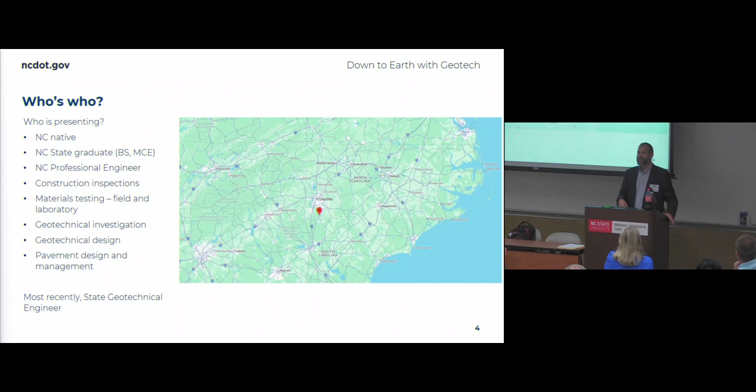So further introductions, I just kind of wanted to introduce the unit. Let you all know, so this is pre-construction focused. And so the unit on the pre-construction side is sort of divided between investigations, the geologist, and design and the engineers. And so I don't need to read the map to you, but what I do want to point out is...

All right, first of all, if I put this map together, I would not have put these in alphabetical order when the colors go in a different order. But I'm just working with what I got here. So what I want to point out is we got an Asheville office. They're all okay, for those asking. We've been in touch with everybody. We got an office down in Harrisburg outside Charlotte.

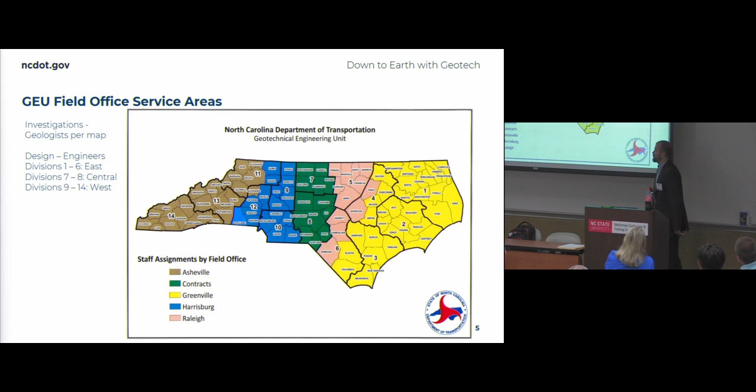That's where design is, and Eric is my assistant in the West. And then we have a group at Century Center that's called Contracts on this map, but we cover 7 and 8 currently. And then we have a Garner office in Wake County that they kind of divide up the coastal plain with our Greenville office. So we've got investigation crews in Greenville and Asheville, which I'll touch on shortly. But just kind of wanted to throw in some org slides.

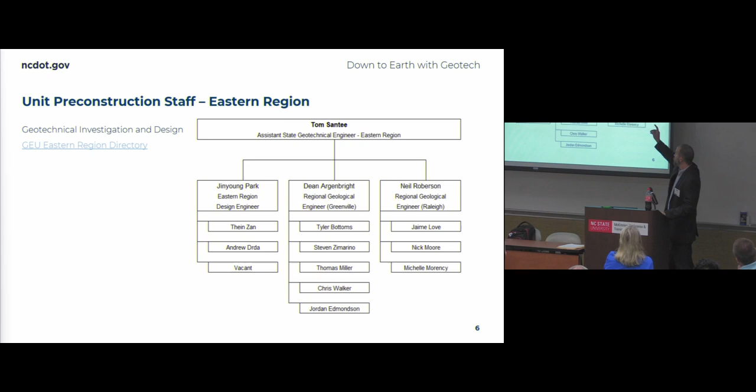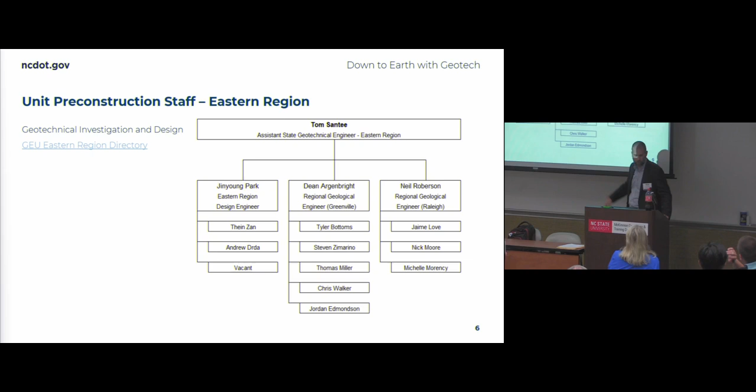I kind of just wanted to introduce the East. So a few of these guys are here from the design group. Y'all want to raise your hands? Jinyoung, Drda. Thein didn't make it, I think. And then the other two are investigations groups, and then these guys are our internal drill crew in Greenville.

And then centrally, like I said, we cover 7 and 8, design and investigations. That's also where we handle contracts for the field offices. So everybody that's contracted through our contract works with that group. They handle the money and contracting aspects. And then the statewide pavement group, or geopavement group, is there.

For those of you that aren't familiar with how that's set up, not confusing at all, but we basically do pavement up to the bottom of the pavement, the grade 2 line. We tell them what to put it on. We tell them how to prep subgrade. We give them all those recommendations and quantities. We're going to kind of touch on that in a little bit.

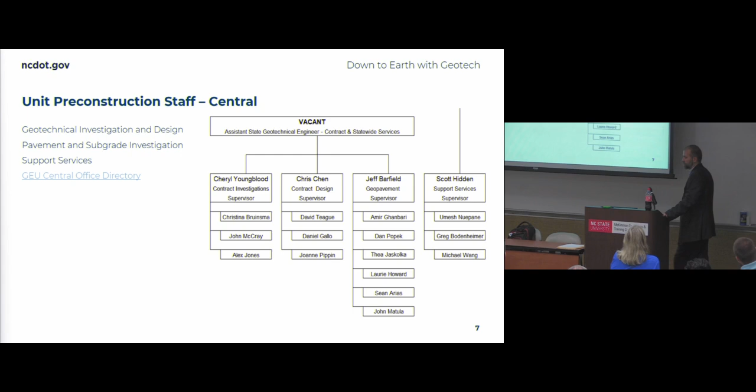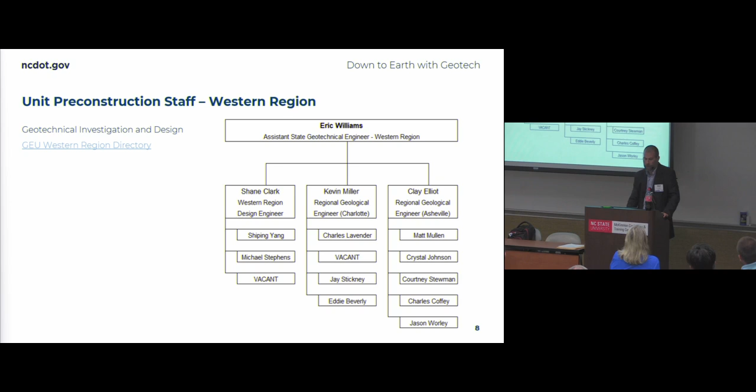So just kind of want to let y'all know that too, because as you're working through things and as you're working through projects with your consultants, more just so you know who to reach out to. And if there's any question about what's expected, you know who to reach out to.

And so one thing I wanted to dump in here for the PM folks and everybody else is this work request form that we sort of put together, or it was together, it was floating around in various states of completion, and we combined our service lines into one. So for you internal folks who are managing projects, you've probably already seen this, but we use this to basically track projects within the unit. The unit has traditionally worked on request, and so since we work on request, we have to receive request, and receiving request in a standard way helps us to process that request and keep things moving.

So that's what we tried to do here, is just give us all the information we need. And then these emails, which didn't come through very well but are also at the end, are the Geo pre-let emails that some of you may have seen. They have the divisions actually in here, so you don't really got to think about it. You just got to know where your project is. You hit that email, it'll hit all the right people in those org charts shown back in there, and you know that you're getting it to the right people in the unit. We'll disseminate it down, get somebody working on your request.

This can also be used, I mean, this doesn't have to be used for projects. So like if a project is not running through our contract, you can use this to say, hey, I got this scope and an estimate, and you review this one. Send that in. We got another, there's an other one there. Type it in the box. What I need you to do is I need you to be involved. So that's all we're really looking for here.

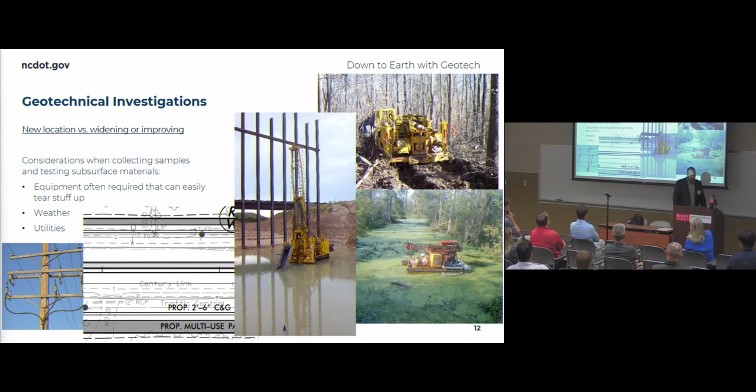This doesn't come through very well, but there's a lot of widening projects now. Guess where all the utilities are? Where we're widening. How are you going to put a hole where all the utilities are? And on top of that, when you're looking at subgrade, a hole 50 to 100 feet off the road probably isn't going to be indicative of what you're putting pavement on anyway. So in addition to the utilities and the weather, which is raining up until this week too, there are other complications out there.

Like I said, we're some of the first people to make contact with property owners. I don't want... we're some of the first people property owners see, and although we're covered by a general statute to go in and take samples and do what we need to do, you catch more flies with honey. So we generally try to be amicable, and since I've been over here, we've also prepared a template letter for property owner notification that standardizes that language for our consultants.

Access coordination, this could be a picture of the railroad up there. Everybody loves working around the railroad, right? I sit in meetings with contractors, and they're asking DOT, hey, can you get me into the railroad any quicker? No, it holds all of us up too. Like everything that gets pushed down the road, that's just how they work.

Further complicating matters, this is an excessive bench here. We probably wouldn't do that, we want to stay away from that. But I put it in to talk about cutting benches. Thinking further west, the level of coordination has increased drastically, sometimes requiring erosion control plans, getting contractors lined up to come out and do your bench, then come back and abandon it. It just turns into a whole thing now. That's why I put a picture of the mulcher up here, because a lot of people have gone to mulching — you don't break the root mat, you can drive right in. So that's the preferred method.

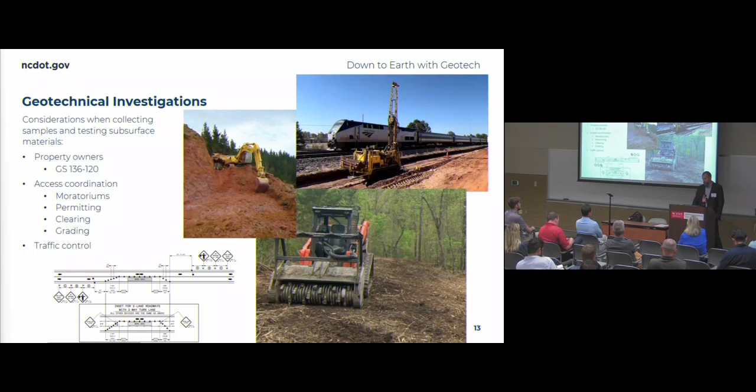So now we're really getting into the PDN revisions, which I worked on in my old position with John and a few others, and sort of drug into this position and wrapped up because I was already into it, and I'm learning how to delegate better.

The 1GT1 is more of a planning phase for us, and at this point I'm just asking that we get a request to know that a project is starting to move forward. I've added — this is nothing new, it was there before — both Geo-Environmental and the Geotech were there.

Sorry to any environmental folks, but this isn't a Geo-Environmental presentation. I love them, but not what we're talking about today.

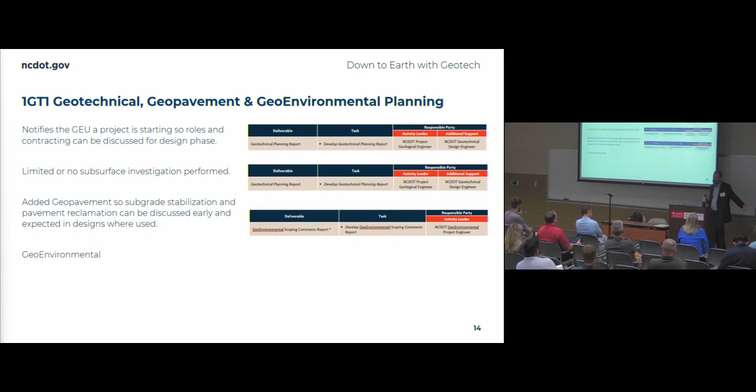I did add geopavement to this because I've seen a need to coordinate subgrade stabilization, what's been done, what works for certain projects in certain areas. We need to start having that communication earlier about getting some of this stabilization, be it chemical or aggregate subgrade, into plans and estimates earlier.

One big change you'll notice is that I took all of those old boxes that basically said start here, follow up with us here, then finish it up, and I stuck them into one. So the geopavement and the roadway are now under one activity, like subtasks under that activity.

For those that have been working with the unit, we've been letting POs and projects that way, trying to keep those investigations together, because similar equipment is used, drill rigs for both of them most of the time, and similar coordination, traffic control, utilities, all those things.

So as not to duplicate efforts, to streamline the investigation and get things done quicker, and also so that the engineer is looking at both aspects, because you want to look at your mass grading and everything, all your earthwork coming up to subgrade, but also pay attention to what you're doing with that subgrade when you get it there.

The other thing I put in here was, you've got your Bentley ProjectWise. I would encourage some of the private teams, as you're working on this stuff, to think about how we can not duplicate work, because the traditional workflow for us was we sketch it out, put it on the 25% plans at the time, and then turn it over, and the roadway person has to take it and do it all over again.

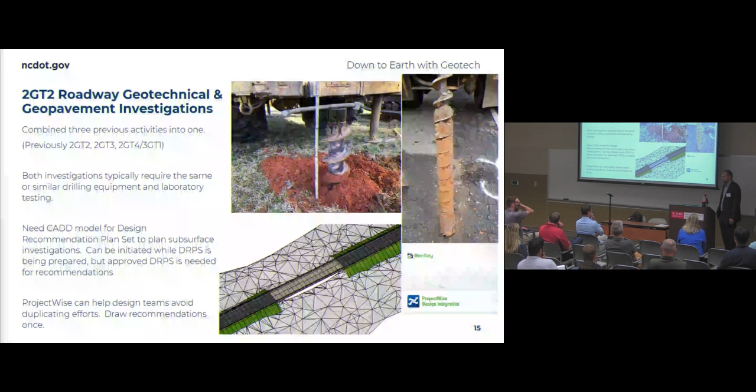And, ain't nobody got time for that. That's all I got to say about that.

So then I threw the structure stuff in here too. Two slides - these were the actual deliverables.

Something else I did was spell out some of our special details and other deliverables that weren't apparent in there. Like, we mentioned nothing about provisions previously, I don't think, and those can be quite important when it gets to our friends down there in contract.

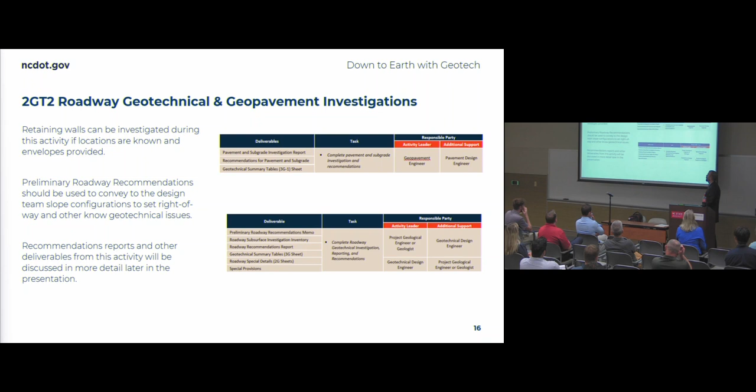Nothing much else to say. I think y'all can read the slides. I can't.

I just wanted to mention the structures investigations, because Sherry pointed out as we were talking through this that one thing that comes out of the structures recommendations that the roadway folks need is the approach fills. So I stuck that on there.

We have simplified those last year into two types now. Type 1 is just spill through. Type 2 is basically your wall. We only recommend 1 and 2, and then if it's an integral abutment, the contractor picks the A alternates themselves.

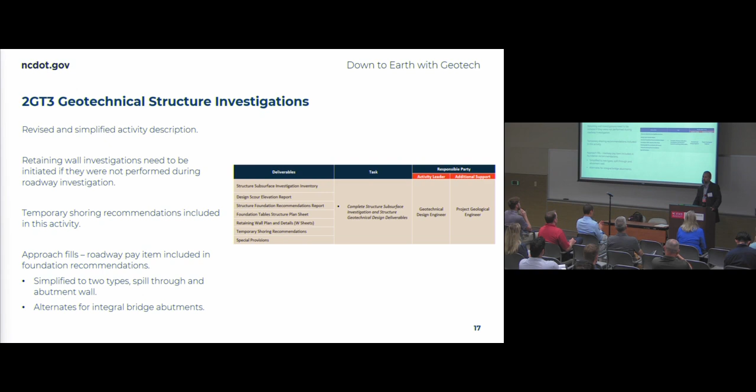Temp shoring could be in here too, which is roadway people. And then for your retaining walls, if you didn't know the location, which doesn't really happen with freestanding walls - when we're working with roadway, y'all usually know where those are going pretty early on, so we can pick those up pretty early. All we really need is an envelope, an idea of height, location.

So I added this one in an effort to fix some of the PS&E package problems, and I didn't know what to call it. So you've got verified geotech deliverables - really creative, but I think it gets the point across.

Again, internal workflow - geotech was not involved. We turn our recs in, we move on to the next project, we keep going. So right now I have this as DOT people, but the intent there is just that the DOT people reach out to the engineer and make sure they understand what's needed so that they can get their project to let.

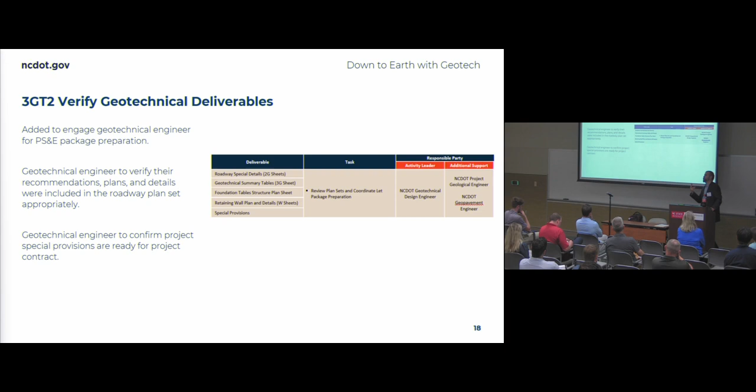We've identified we need to start sending that notification internally earlier and reaching out, but this was an attempt to get that from the project team side as well. Just to make sure that provisions are in order, all the geotechnical details made it into the plan set like they're supposed to, that it's the right version of the geotechnical detail, those sorts of things happen.

Well, it could be anywhere right now because we don't have any guidance on that, but I'm going to fix that for you. It's sitting in my inbox. We've reviewed it. These were just some examples, and I wasn't really trying to pick on anybody with the TIPs or anything.

But this says final recs. Some of these key recommendations are indicated, but then you have other projects with all these Geotech deliverables. It could be our reports, it could be sheets y'all need for your plan sets, it could be the 3G ones. They're all just kind of dumped in there, and none of them are marked final, none of them are marked key GT, so you can't find it.

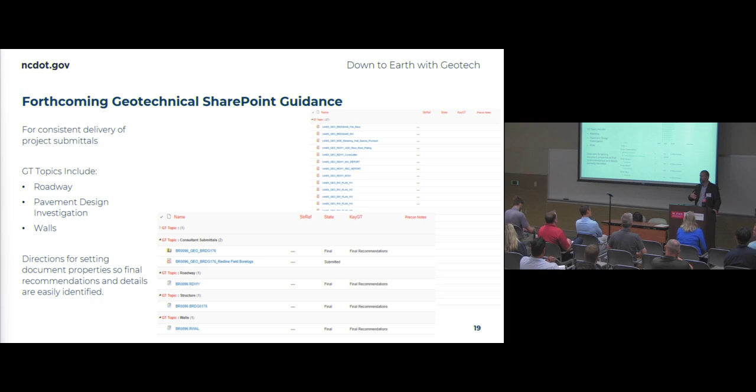So we worked on that by using the road method. We ripped off and duplicated what location and surveys did and put a little geotech twist on it, and I think it turned out really well. That should be coming out pretty soon, so that will help clarify some of this. The way it's all set up, we have topics for roadway, pavement design, walls. I think we just need to be using it better, and us saying where it needs to be will help everybody find it.

And this isn't a digital delivery presentation or anything. I just put this in here because we just posted some training in August, I believe the beginning of August—it actually was official. Under the ORD section of our website we've posted videos. We tried to put together a quick memo just about where we're at, what's expected for projects, roadway, structure, that sort of thing. I think that got us a little bit of stability. We're at a spot where we can produce a deliverable. It looks a lot like the deliverable we used to.

Problem is, some of the workarounds are kind of labor intensive, and where I've left this—I didn't write this down, but you really need to talk about what's needed for a project. How much effort really needs to go into a model. If nobody's going to look at it, don't spend 200 hours doing it. If you're going right beside a road and all your borings are at grade, you just look across the top of those borings, and you really don't need this.

So that's all I'm asking as we start getting some of these projects in, is just think about what the project is, think about what's needed. Talk to the designer, the Geotech, and see what they need, because we've gone and done some of this before and the Geotech never looks at it. He just takes the boring logs and starts designing shafts. This is on the shaft location—design right off of that.

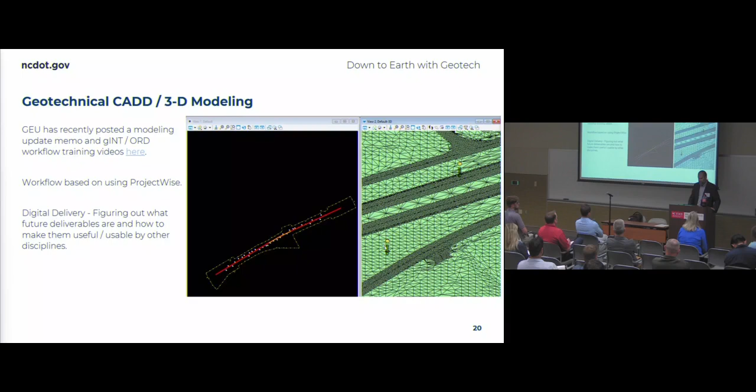So we figure we've got about 2 years, because they're sunsetting gINT. We're actively trying to figure out what product we're going to use, or products, and how we can present a deliverable that's useful by others—something that feeds into a 3D model that somebody else can use without us sitting there telling you yes, no, yes, no. So that's where that's at. On digital delivery, presentation—we'll move on into walls.

So retaining walls, roadway design manual, chapter 5.5. I told some people here before, it's been a few years since I read the roadway design manual, back when I was more heavily involved in design. As I started putting this presentation together and working with Sherry on some training, I had the opportunity to do a deep dive back into that, and it's an awesome manual, I will say. It covers a lot of this stuff. I was putting this presentation together, and then I saw what was in there, and I was like, well, it's already said right here, so I won't really quote it or read from it.

I kind of want to expand on it a little bit. But I think everybody generally knows what walls are. Like I said earlier, these wall locations, if we can figure them out, specifically freestanding walls, like what we would call roadway walls, if we know where those are, it'd be helpful to get that out earlier so we can start talking about types of walls, because that would impact investigation.

One other thing I want to put on here, that last part down there, envelope zero out. We get a lot of walls that are just blocked at the end, and that's not how dirt works. Soil, you get paid for it, it's soil, but it kind of spills around. You want it to kind of pinch out, right? So just something to think about.

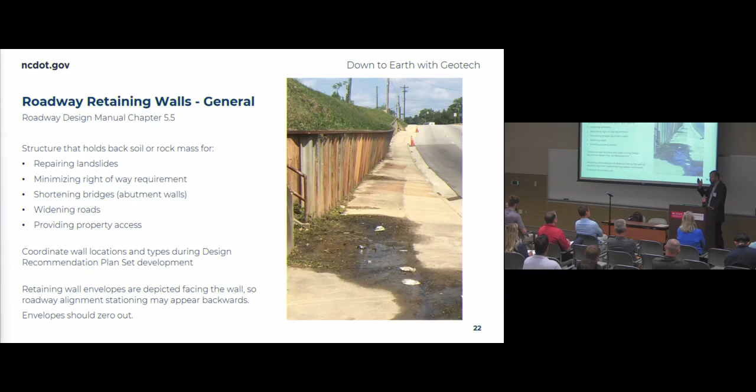As the Geotech, I had to go back and figure out what slope was going to work there and what that would look like on walls and modify them on the back end.

Page 5-59 of the Roadway Design Manual basically says, look at the alternatives for walls. This is a project up in Polk County. That's an MSE wall at the bottom, and that's a soil mix wall at the top. Like this slide says, not considering right-of-way costs, that soil embankment is always going to be your cheapest option. Then reinforced soil slope, you go steeper, you can go up to 1 to 1, half to 1 sometimes. And then retaining wall, pretty much near vertical, so no right-of-way. But just things to consider, not only from a construction standpoint, but as you start steepening things up, from an investigation and design standpoint, things start to get more involved.

So depending on your project, some bridge projects, you just need to be sure that you're investigating what's needed, proposing what's needed relative to the job.

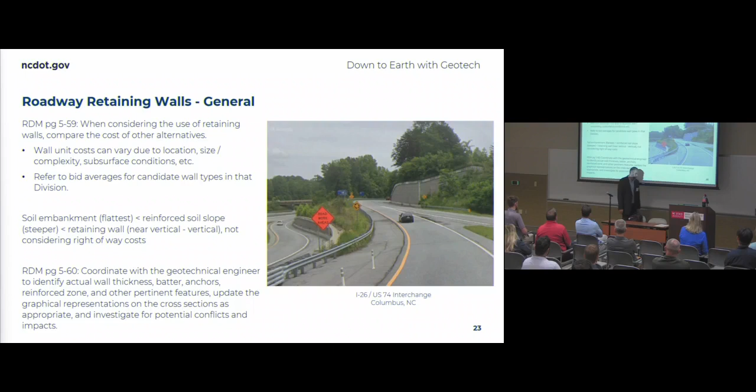This last part I thought was pretty interesting, because that's kind of what the rest of the slides are going to show. You always see it on the cross section, you see it in plan, it's just the thick line right there. It's 1 foot thick, right? That's it. So what I wanted to do was basically just fly through these slides.

These are a few different types of walls. This sort of mirrors the Roadway Design Manual presentation of the wall types. On the fill walls, these are the small blocks. You can barely see this at the bottom, but it's like an 8-inch face, I think it's 16 or 18 inches. And you just stack them up. So this is basically the same thing as an MSE wall or whatever, just without the reinforcement.

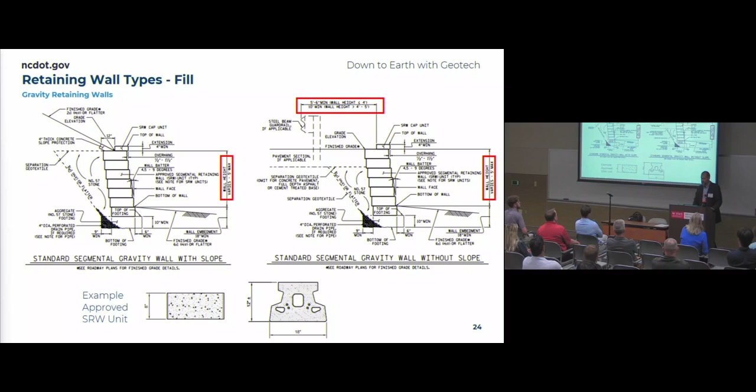This is a standard, kind of an off-the-shelf, works up to 5 feet. But again, if you start putting this in and you have to protect it with a guardrail, you end up needing like 5.5, 6 feet there. So you can't just butt things right up against it.

This is another gravity wall, these are bigger blocks, so these are precast gravity. We also have, that's our drawing. We don't have a standard for this because basically the taller the wall gets, the bigger the blocks you need, right? And so the bigger the blocks you need, the bigger the footprint gets.

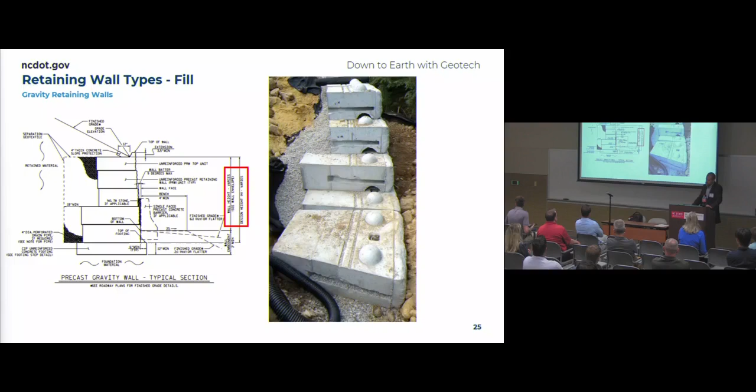And so that's a 4-inch pipe. I think I estimated this one. I didn't do this one, but these sometimes are like 3 and 4 foot wide. So you got to open up a 3-4 foot wide hole, and then you got to go back up from that to make room for all the drainage behind it. So again, not a foot thick.

And then cast in place. This is our standard cast in place wall.

Up at the top is the table for the footing width compared to the wall height. You can see that those widths get pretty extensive as you start getting up around 10 feet or whatever, again more than a foot. Just wanted to put this in here.

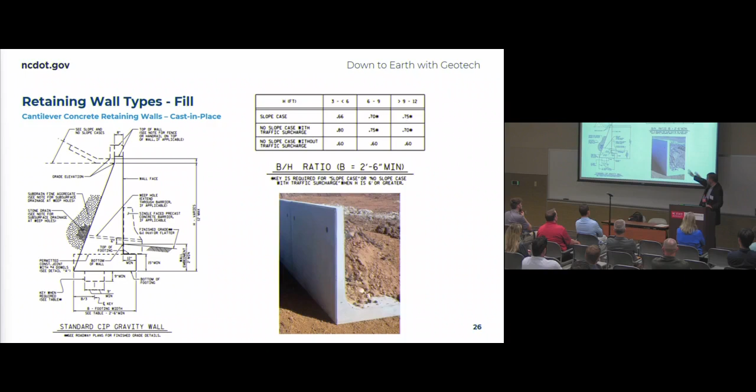I meant to say it on the last one, but the precast cantilever options are becoming more prevalent these days, I've noticed. This is just an example of one of those. Basically all your weight on the heel keeps the wall stable.

So MSE, I think everybody's seen a lot of these. I drove around the map of North Carolina and tried to find one that was not near a bridge. After a few minutes of trying, I was like, okay, just don't show the bridge. So that's actually an abutment wall, but just pretend, because I didn't show the piles on here.

But we have details for the abutment walls. We also have details for when they're freestanding. This is a panel version. I think the next one is also the panel version. There's also an SRW unit version, which were the smaller blocks that we showed.

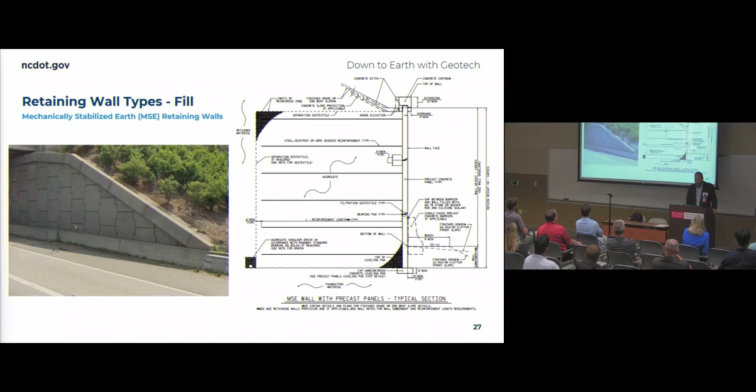MSE is pretty extensive, so I don't really think we need to spend a whole lot of time on that. Reinforcement can be steel, y'all know all that, you can read that. Oh, one thing about that though.

So this is just the SRW, these are smaller units. I stole this picture because it shows the grid, it shows the reinforcement, kind of shows you what's going on. We don't really use these on high volume, like we don't use them on interstate, don't use them near railroads. Those are the panel walls.

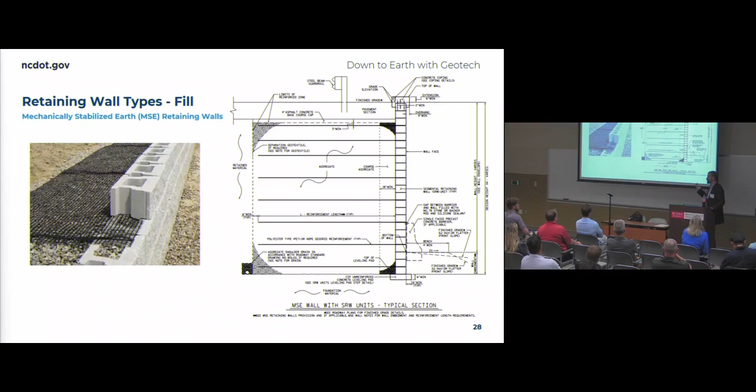Sheet piles, everybody's seen sheet piles I think, but the biggest thing to talk about with sheet piles is embedment. So they go in the ground. Rule of thumb for that is like 2 feet in for 1 foot out, or 2 foot in for 1 foot exposed. They come in a bunch of different shapes. You can go to heavier shapes, but really you're good cantilevered up to about 10 or 12 feet maybe, and that may be pushing it in some places. Just depends on what's down there, and that's why we do Geotech.

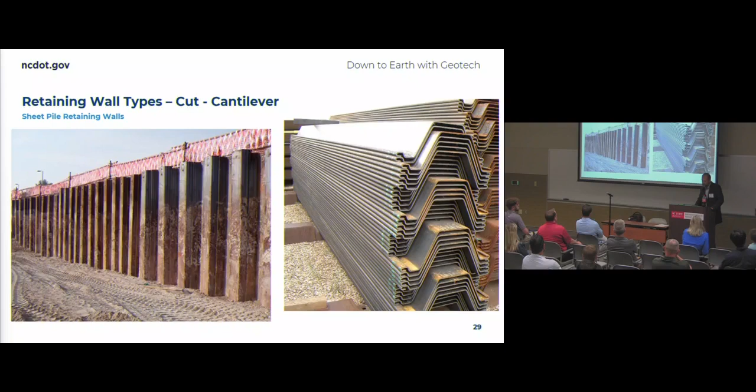I think that's all there. And then soldier pile, I personally love soldier pile. They are a good top-down option for construction, or they can be fill walls. I know this says cut, you can fill behind one too, it works the same way. But just threw some details in here.

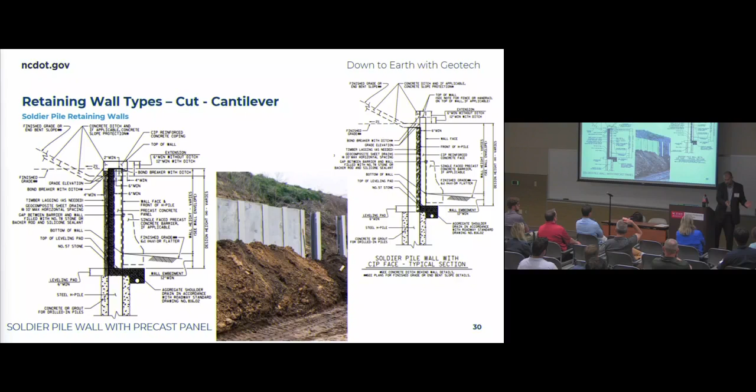Soil nail, this is another top-down option. We've got some out on Wake Forest Road that are in some highly micaceous, silty soils that have performed all right. As you get more into soil, these nails tend to get longer or more numerous.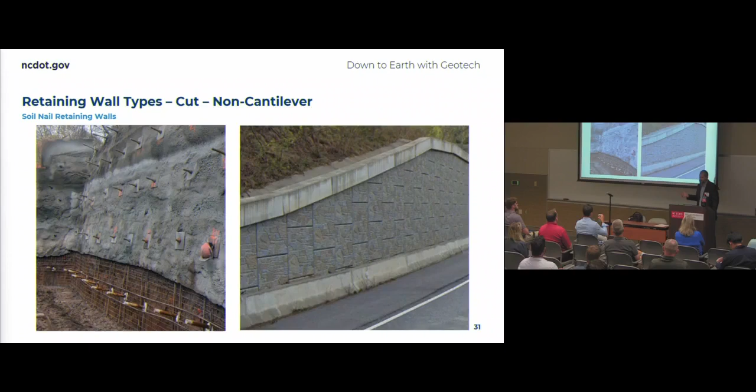But the important thing to know about soil nails, I wanted to show this because again this is top down. You basically come down, and these are each of the nails that they put in. And then this is the unfinished part, so they shot through, you got all this reinforcement, and then they shot through that. What they'll do when you get done is come back and you can do an architectural facing, so that's one thing about them, is that you can make them prettier. And then this is just the detail for the soil nail.

One thing I wanted to point out: the soil nails are actually bars. These are solid bars.

There's not an option for tendons on those, but in this picture for the anchored wall, which is just the soldier pile with an anchor on it, you can see the tendons. Both work the same. It's basically encapsulated in grout, and then you put a jack on it and pull it to pre-stress it and hold that wall back into the face.

So this one is not cantilever. As soon as your soldier piles, with an HP 12 or 14 section, you can usually get up to about 12 feet cantilever, depending on conditions. Once you get over that, you start having to put tiebacks in.

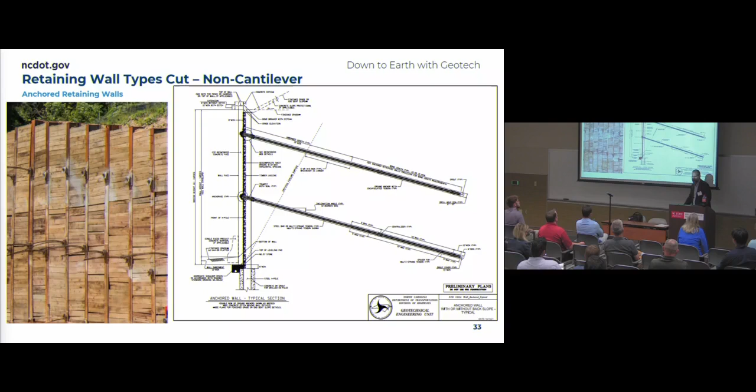This one shows anchors, but you can also do a deadman. Even though it says cut, in a fill or partial fill situation you could do an anchor at the bottom and a deadman or buried element at the top to resist that loading. I kind of flew through that part, so I'll come back to it in a second.

I just threw this slide in. I went through the outward-facing bid averages to give better information, but I went through the stuff everybody else could find and threw these up for division let and central let for 2023, just to give an idea.

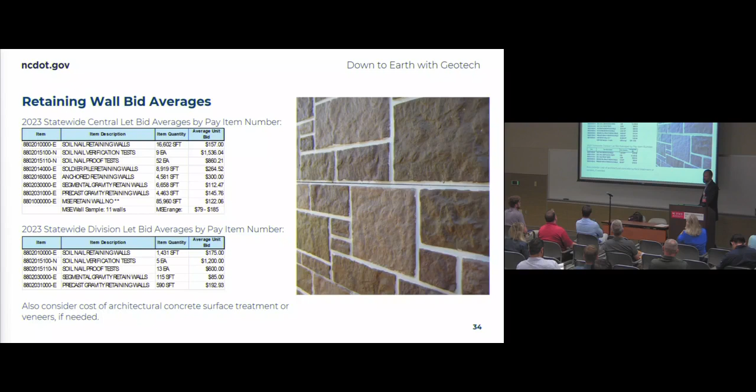I don't really want to harp on this—don't go to your job and start using these numbers for your job, that's all I'll say. We can get you better information for the location you're at and the size of project you have, to help weigh out your options.

So our deliverables for this: you get an inventory report that gets uploaded to let prep and final plans. I always did a W sheet package, but since I got over here I found out you don't have to for some standard small walls. Basically the package would be your plan, where it's at, the envelope, how tall it is, what it looks like, and then your sections and any notes for the contractor.

So a lot of these walls, other than cast-in-place and standard walls, are actually designed by others post-let. The internal components and full wall design would be done post-let. We're just basically making sure a wall will work there.

Again, the envelope is facing from the front—I don't remember if I said that earlier, but that's the face of the wall. So your stationing could go the other way.

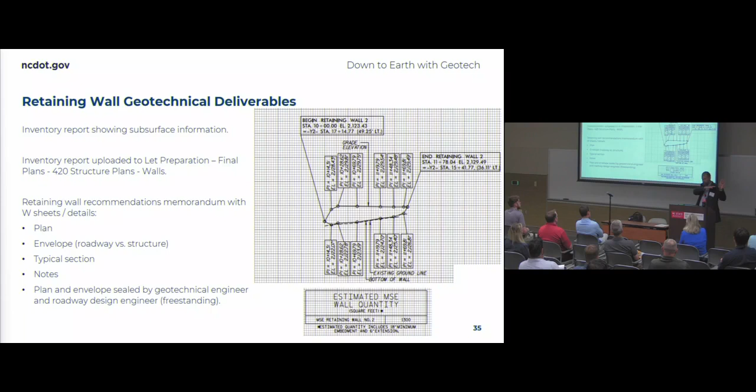This is just a quick slide. Those are the walls that are in the standard specs, and the walls at the bottom require a special provision, with a link to our page where these provisions are at to get you started.

Geotech, roadway people—tell your Geotech to go find those.

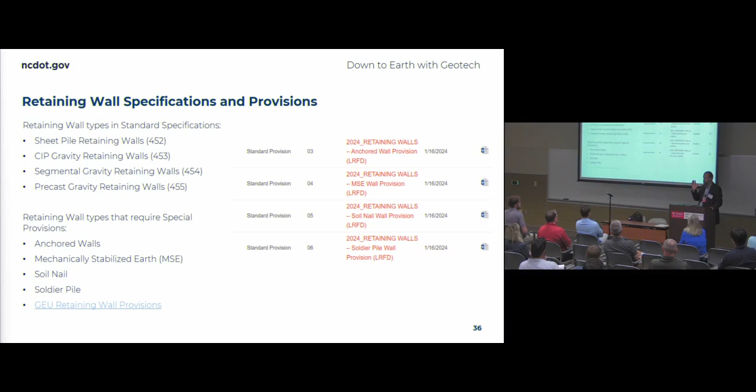I just threw sound barrier walls in here to say they're similar to retaining walls—you're retaining sound and wind. They still have to be investigated. Embedments on those are more like 1 to 1-ish. They are cantilever, but there's a lot of drilling and dropping going on with those too. You're drilling 30 and 36-inch holes every 10 to 15 feet, so it's kind of hard to run utilities there.

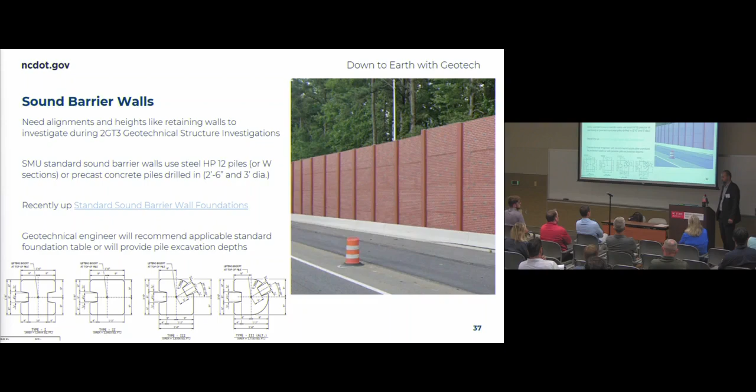Before I leave retaining walls, one thing I want to say: you see this 1-foot-wide element on a plan, so start thinking about working with your team and putting those reinforced zones into your plans, especially as we're moving more toward digital models and better able to model this stuff. It's not that you can't run utilities or put foundations behind these walls, but complicating it is not going to make it cheaper. Just something to think about.

So now into the roadway reports.

Not much to talk to y'all about on the inventories. This goes straight to final plans, goes with the contract for information, to the contractor for information.

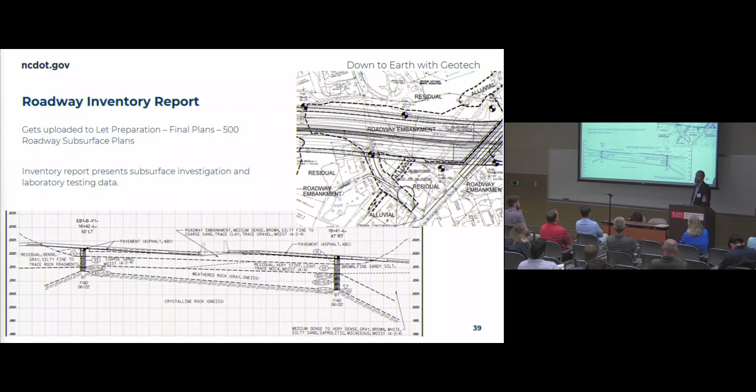This represents what we got into, and that's basically our data report. The geologist and engineer use that report to put together the recommendations we provide to you all. The Roadway Design Manual does a good job describing these deliverables, so I don't want to harp on that.

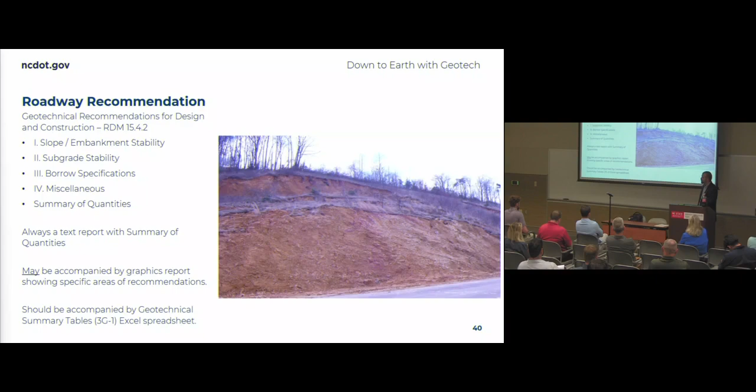Found this cool picture of a slope failure. That was cool up until this week - now I'm having nightmares about it.

So roadway recommendations - this was actually 540 in the Triassic Basin, and they laid it back, but they had sloughing failures pretty early on. So just briefly running through our recommendations.

First section is your slopes and embankments. Basically we tell you how to prepare foundation soils to put embankments on them or to reinforce embankments, and then we tell you the slope configurations you should be considering for your job - just some rules of thumb.

Triassic is an exception in the Piedmont because the bedding planes dip to the southeast in such a way that even they're kind of at a 4-to-1 slope. So even when we cut them back, usually over 10 feet, we try to lay them back, but understanding you may not always have the room - you may need a wall at the bottom and a broken slope on the back, something like that. Triassic can get kind of nasty.

In the coastal plain, we usually stick to 3-to-1. Cleaner material just doesn't stick together and stand up as well - although I've seen a lot of 2-to-1s down there that have done just fine, but that's what we do. Then 2-to-1s as you move west of 95 into the Piedmont.

Embankment stability, I kind of touched on - yeah, so that's what it's called. Not confusing at all, it's all undercut - we just call it different undercuts, and y'all have to go find all of it. So I'm open to feedback on how we can fix that. But embankment stability undercut would be undercut under the embankment section, so undercutting muck, whatever.

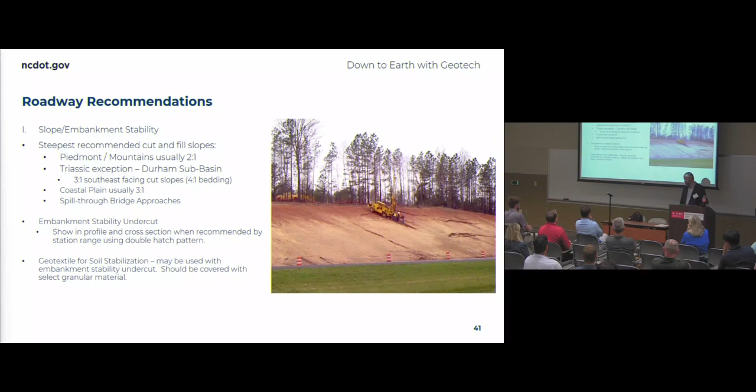Geotextile for soil stabilization could be used in the bottom of that undercut. I'm just mentioning geotextile soil stabilization here because we're going to get back to that in a little bit.

Slopes - this is also, like I said, ground improvement. If we need to do something to support that embankment, that may be in here, maybe in an addendum. If we do any of that ground improvement, we probably need to provide you with a provision describing how to construct it and some details showing how to construct it.

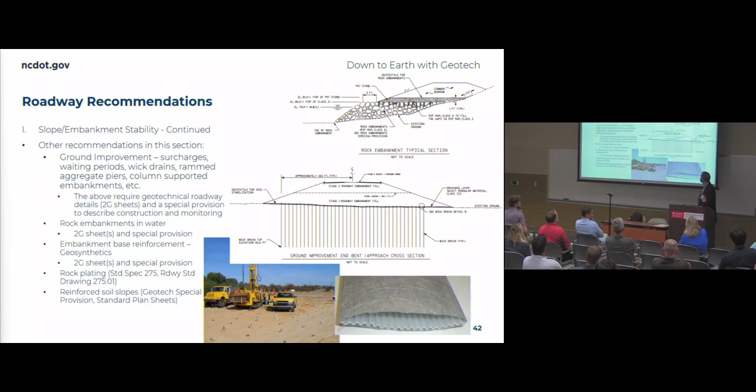The stuff up here, rock embankment - that's typical for embankments in water, but we have to tell you how to choke that off and put your road on top of it. This was a wick drain job I did in a past life with stage construction, because we had to get the clay drained out and could only build it up about two-thirds of the way before we had to let it sit and then put the rest on.

So subgrade stability, section 2 - this is more for the near grade sections of the project. I put subsurface drainage in here because we always get a lot of questions about this, and they changed the roadway standard details, so now they've got these details shown up here for where to put it in the medians.

Subsurface drain is, for those that aren't Geotech, a more permanent drain - it's basically wrapped in geotextile stone and meant to function indefinitely, whereas the underdrain and blind drain are probably going to clog at some point, and they're really meant to drain for constructability. So if you've got shallow groundwater, you probably want to go more with the subsurface drain.

Also boulevard ditches, but we just don't have the right of way - going back to the projects we're working on, you can't cut a 6-foot ditch in everywhere anymore. So grade point undercut is just another type of undercut where proposed grade crosses existing grade. Undercut for subgrade stability would be recommended in this section, and this is just your straight up undercut - we'll touch on the undercuts later.

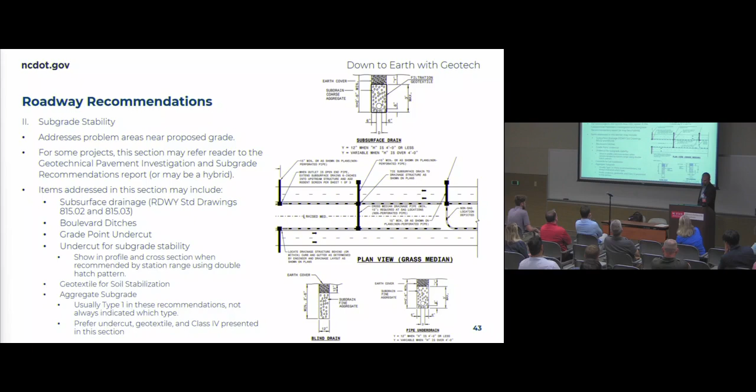As far as borrow, this table that's in the roadway design manual is the same table we use - but don't tell anybody.

We'll give you shrinkage and swell. This also talks about which borrow criteria to use, statewide or coastal plain. And then any of that geotextile from the previous sections, you'll have to cover it with select granular, and so that would be down here as well.

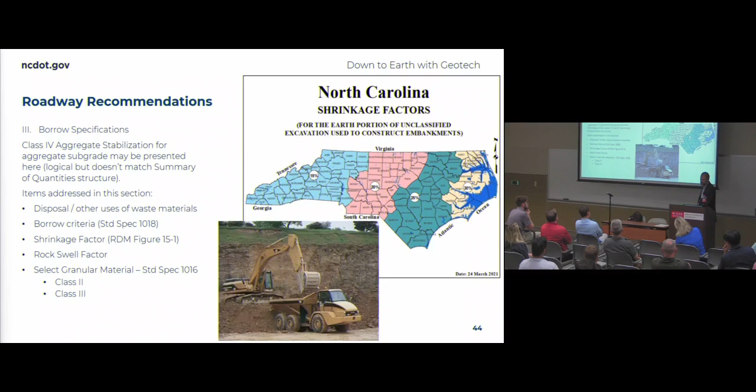The miscellaneous section is where we get into the unclassifieds and the reduction of unclassified quantities - loss due to clearing and grubbing, your unsuitable waste, your acceptable but not in the top 3 feet of embankment, and then degradable rock, because all degradable rock and acceptable sort of have special handling. This is also where we'll call out the water wells in the project that'll need to be abandoned, and then ponds, because ponds in the project, you need to figure out how to get rid of them.

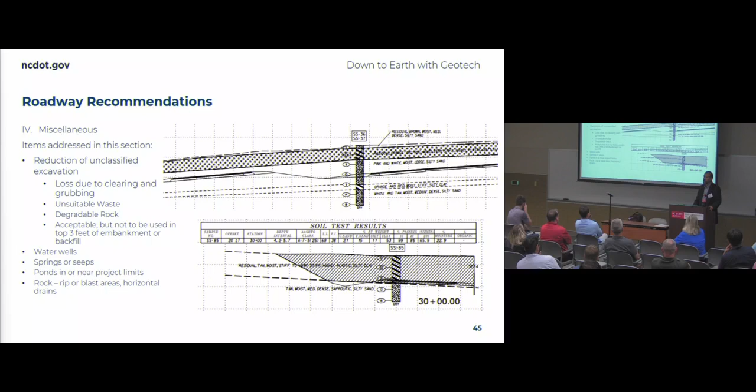It's just like crack monitoring - you kind of want to go out, check the sediment in the pond, and then get a baseline so if you have any future problems during construction, you can say, well, this is what it was before we started.

So moving along, all of the roadway recommendations text report should be accompanied by a summary of quantities. I'm pretty sure most of you have seen this.

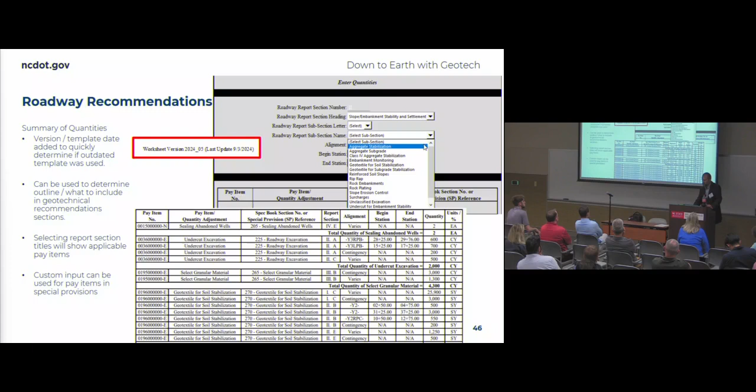The one thing I wanted to point out is because some of these pay item numbers have changed a few times over the past few years, specifically related to aggregate subgrade, we added a version. I mentioned to the Geotech folks, it was never clear to me, but if you're trying to figure out how to outline your report and write your report, if you go in and pick the quantity or section you want, it'll tell you all of the pay items that go with that. So like aggregate subgrade is supposed to go all under section 2, but could be everywhere. We'll touch on that at the end.

So then the only other thing I really wanted to point out with the roadway recs was the 3G1 sheet. I've been talking to Roadway about this a little bit. This is still provided in an Excel form from us. And the way the roadway design manual reads is that the poor roadway designer has to read our minds, go find all these, and then combine them. If you're on a team for a division project or something, I leave it up to the roadway and the Geotech to figure out how that gets delivered. To me, it's just a simple question of, is this all of it, or do I need to go find more?

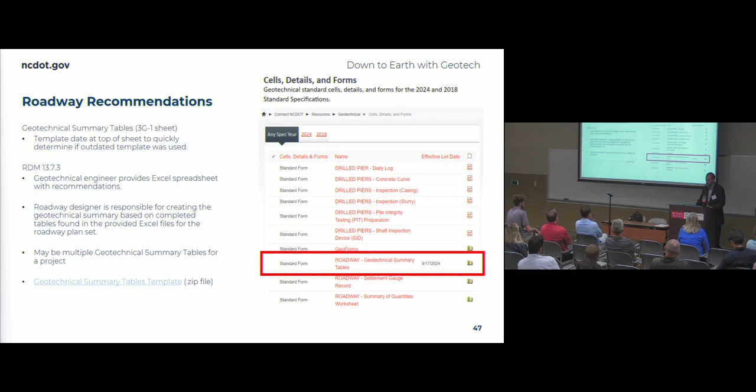And then this is just our 3G1. I think you've all seen this before, so not really much to talk about here. Oh, other than that, it has a versioning date on it too, which comes in handy with aggregate subgrade.

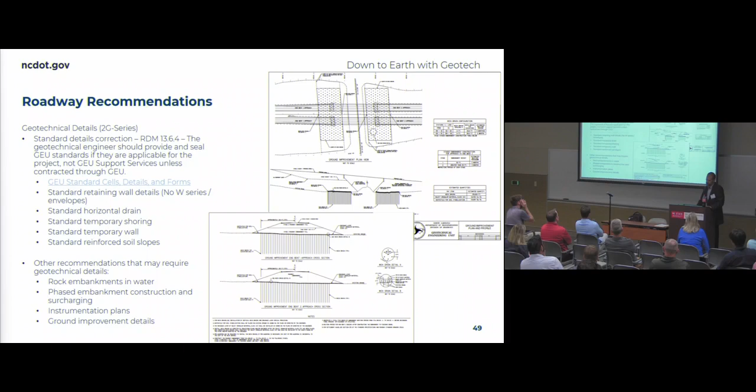Geotech standard details, already touched on this. There's a few things in there that have standards from us, and then a few others down at the bottom I just mentioned off the top of my head. So we do a lot of surcharging, wait periods with or without wick drains, and a lot of what you'll see for those would just be details like this where we're telling you build the embankment to here, let it sit this long, that kind of thing.

Reinforced soil slopes - these are geocells getting filled in. Kind of just wanted to talk about reinforced soil slopes because these could be presented in those recommendations up under the slope section. Could also be an addendum later if it wasn't known that something needed to be steepened up. This is not the same as a reinforced embankment over soft soil. That is completely different - it will require a detail and a provision because the designer will have to tell you what geotextile to put in it, what strength, how much of it, that kind of thing.

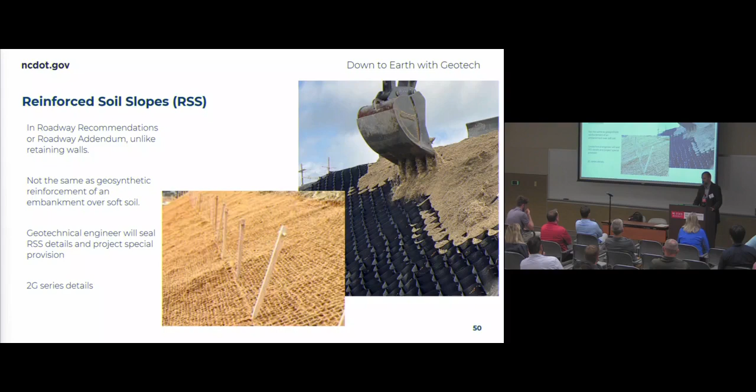We've got standards for high and low groundwater for a max height up to 36 feet. And they're reinforced with GeoGrid - not this GeoGrid in particular, but this was a cool picture of GeoGrid.

So for non-standard, the engineer - I basically put this up here. Our standard details gave me a pretty good start as a designer, and then I just kind of modified those if we needed to make lengths longer or whatever, and adjusted the provision accordingly.

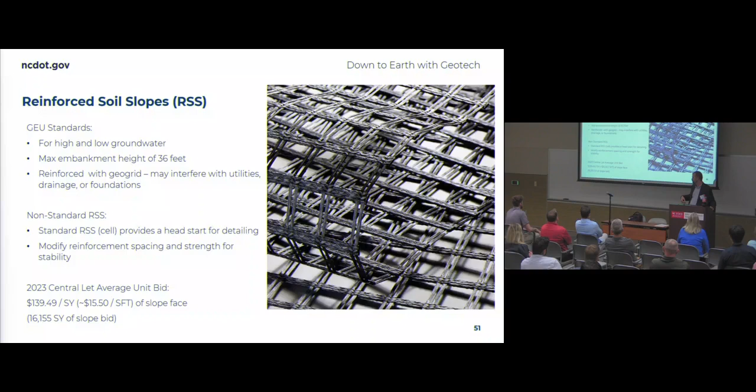Down at the bottom, I just put rough cost, but watch out because that's square yards of slope face, so it's not a direct comparison back to the wall cost.

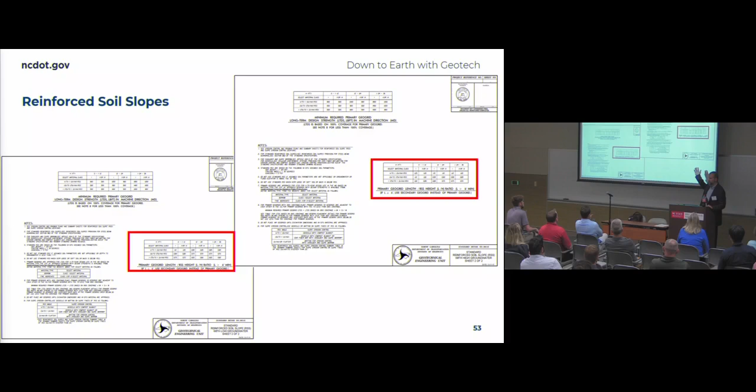This is just our standard, not much to talk about here. The biggest difference between low and high groundwater is how much reinforcement you need. That's all these boxes show.

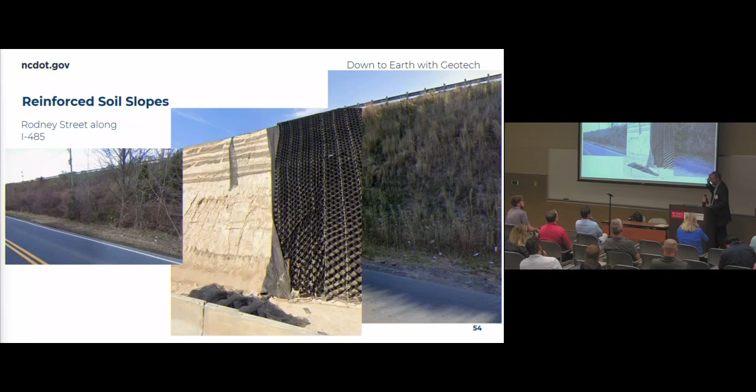So, unclassified quantity reductions.

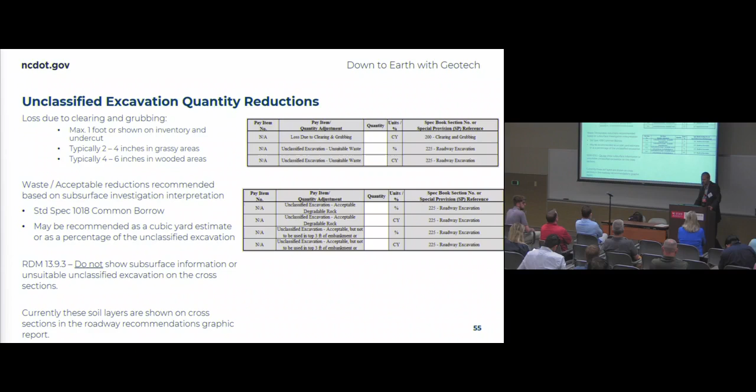Anything under a foot would get covered here. If it's more than a foot, it gets called out on the inventory and undercut. I put in the typical recommendations for thickness. The only other thing on this is referring back to the common borrow spec, which is what I used as a consultant as guidance for what stays and goes and can't be where.

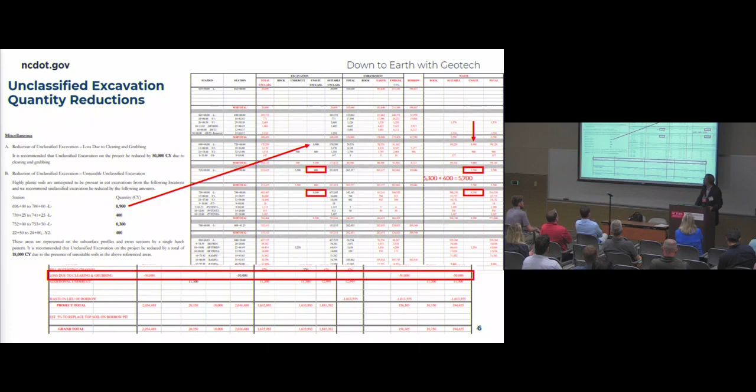And this is just a quick picture of how those quantities get incorporated into the earthwork balance and where.

Then our other report, why we do two reports, is because one looks more at the mass grading while the other looks at supporting the pavement section. We're also going in and doing this kind of thing where you've got this drainage layer, this concrete pavement with all this asphalt around it, and this little bitty drainage layer, so the only way this is going to drain is that way. That's a lot of what we look at: what pavement sections can you put up beside this, or what do you have to do with this to make sure you're not cutting off drainage, because then you'll have water running up through your pavement.

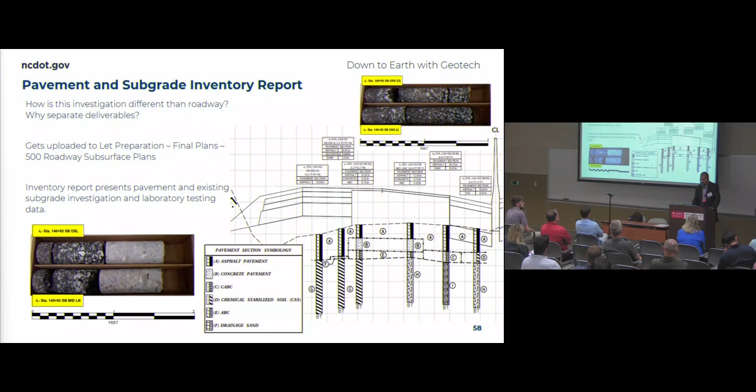The other thing it looks at, this is also where we provide the recommendations for the chemical or aggregate subgrade stabilization.

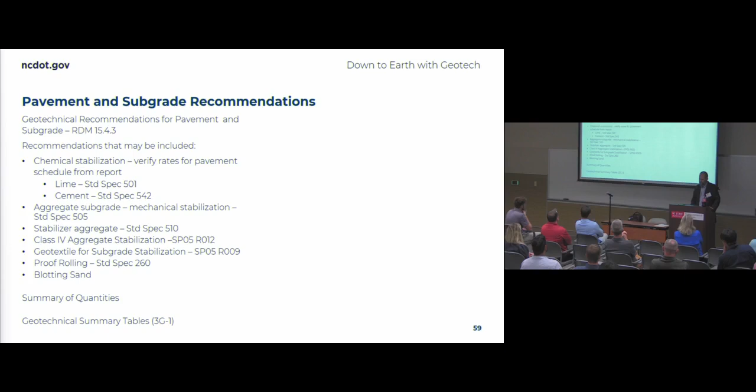We've pushed this up earlier in the PDN progressively over the years. The intent there is that we'll go out and start communication with the roadway and the project manager, basically the design team, to let them know what's coming from that perspective, because those weren't getting added into estimates until after right-of-way. So we were seeing cost spike because now all of a sudden we're stabilizing the whole alignment and nobody knew about that. That was a problem, and that's one way I can think of to fix it.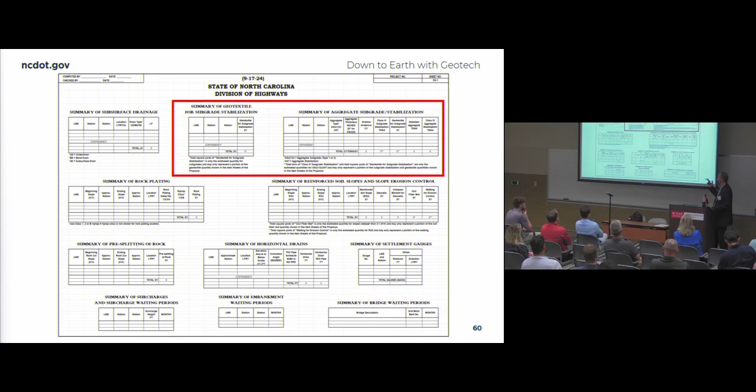And then with this one, you'll get the quantity summary, just like the other written report. But these are the two tables on here that you'll usually see associated with the pavement and subgrade recs.

I kind of put a separate section in here, so both reports could have undercut in them, shallow or standard, or undercut excavation is the pay item. But it'll be shown in the graphic report that may accompany the recommendations like this, and we're just trying to get that into the plans.

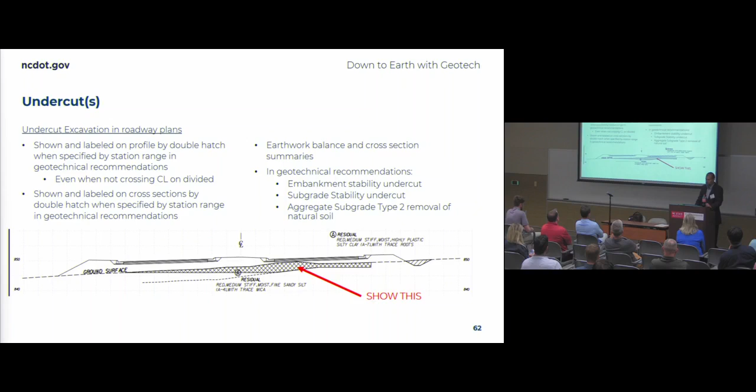I don't have it on there, but on one of these slides it basically says it's the roadway designer's responsibility to show it and label it. And then, so undercut, shallow undercut, where you show it.

That one shows up in typical sections. This is a holdover from when we had only one type of aggregate subgrade and it was still called shallow undercut, but that's why we've created details, which I'll show in a minute. But it doesn't show up on the cross section summaries.

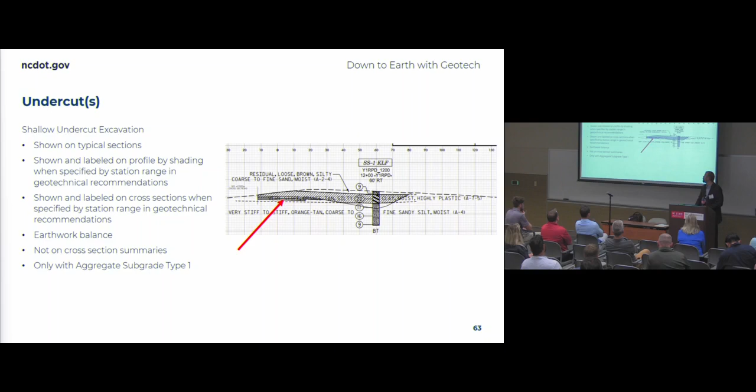Between the undercut, something else that came up earlier was if there's a discrepancy and it's not written down anywhere what to do with it. So who's right? The roadway design manual basically says that the roadway designer's quantities supersede. All I'll say is that if you're a roadway designer and your quantities don't come close to what Geotech did - that's a relative term, I know - but if there's a discrepancy, you may want to talk it out because something may have been missed. We've had projects where stuff was missed, there was a misunderstanding, miscommunication, and it cost us like $12 million, so we kind of want to avoid that.

But again, theme of the workshop: communicate.

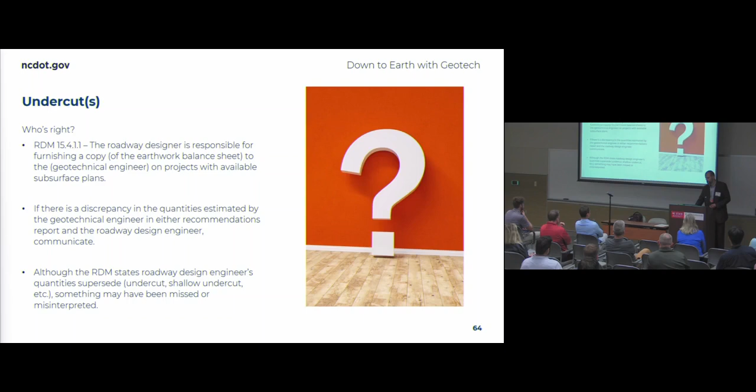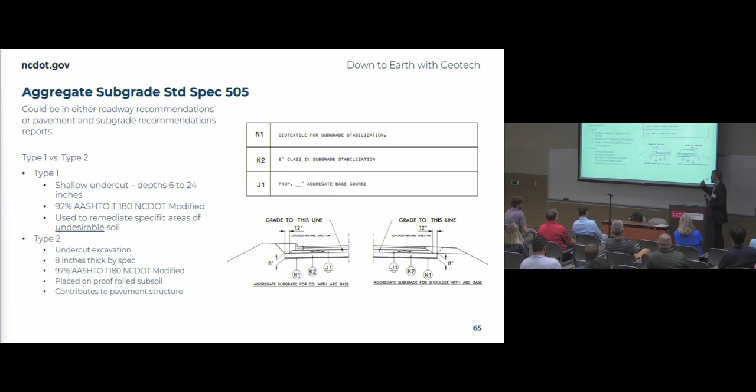So then now we're into aggregate subgrade, which has been a major point of confusion lately. One thing I will say, we've got two types now. Type 1 you'll mostly see in the roadway report because it's used to repair specific areas, whereas Type 2 is more used under larger sections of an alignment to stabilize. It also contributes to the pavement section structurally, so they will include Type 2 in the structural design of the pavement. It's supposed to be placed on a proof-rolled subsoil - you got to do that because it also has a higher compaction requirement, and it's just hard to get that higher compaction out of something that's built on a waterbed.

And so this slide right here is like worth the whole 55 minutes you've been listening, because I am finishing up a memo that basically is to the effect of what I'm trying to convey here, and that is that there's been a pay item change associated with aggregate subgrade, and that has to do with the geotextile. And unfortunately, the easy way to know if you've got a problem is if you've got aggregate subgrade recommended and you don't see geotextile for subgrade stabilization - you got a problem.

That's kind of what the memo is going to say. Sherry told me I need to do like a table, a flow chart - I'm still working through that. But what we're going to propose is that if it's a contingency only, we'd just like the roadway designer to change that quantity associated with the aggregate subgrade and move on.

That's easier said than done because, again, we still use geotextile for soil stabilization, and some of those designers may have combined those quantities, so it may not be obvious that this 150 yards is for aggregate subgrade and the rest is for embankment stability or whatever. So again, it just goes back to communication. I hope to get that memo out pretty soon - it's close, but that's kind of where I'll leave that for now. I don't want to beat aggregate subgrade to death.

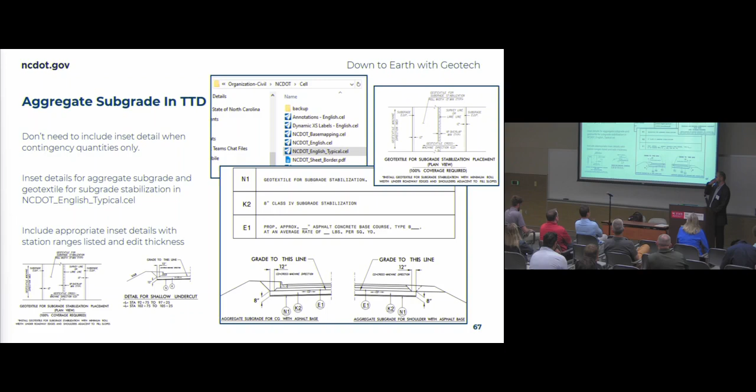Also what I wanted to point out, this one was done well because you've got the section detail for how to build it, where to put it, where it's at. But you've also got the detail for people that don't know anything about the textiles as far as which way to put it - somebody's like, hey, do we need that detail? Yeah, it doesn't show up well, but that's basically telling you which way to lay it down. One big change with aggregate subgrade was we were putting it transverse previously, and that caused us some problems. So it's kind of shingled all the way down the alignment, whereas now it's parallel - makes it a lot quicker to build, too.

We're getting real close, but the last thing I wanted to mention came up recently on a project, and this ties it all back together, too, because the roadway designer, once again, is the one who's responsible for figuring this out.

I wanted to point out that asphalt removal and breaking are typically cheaper than concrete removal and breaking. If you've got asphalt over concrete, it's supposed to be paid at the concrete rate. But on this particular project, they did holes through the pavement and had an inventory report showing asphalt over concrete, but they only had an asphalt breaking quantity or pay item in there.

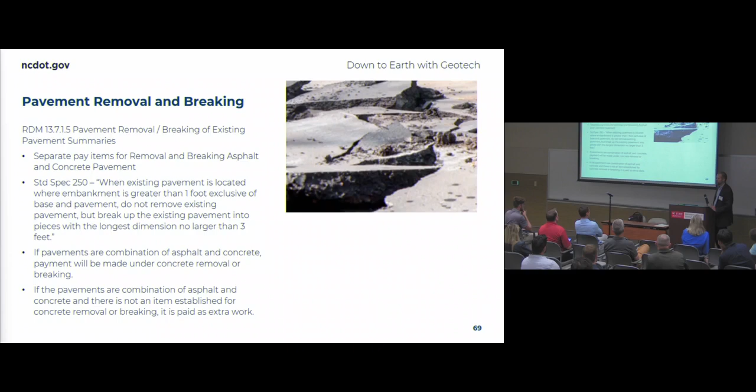So anytime we're encasing or building an embankment around and over old pavement, more than a foot, it's important to break those pavements up. Going back to drainage, we just don't want water hitting that and sitting in there. If you break it up, it all kind of moves with the embankment, and water can move through it.

I'm going to stop there because we've got like 15 minutes and I figured there'd be some questions. Those were the slides. I can go back to slides, or we can talk about something that wasn't in the slides. Y'all can leave. It's up to y'all.

So this presentation started in the direction of chemical stabilization, and then I got comments about how I need to talk about some other stuff. Now I don't know if I really talked about anything, but I'll leave that up to y'all to decide.